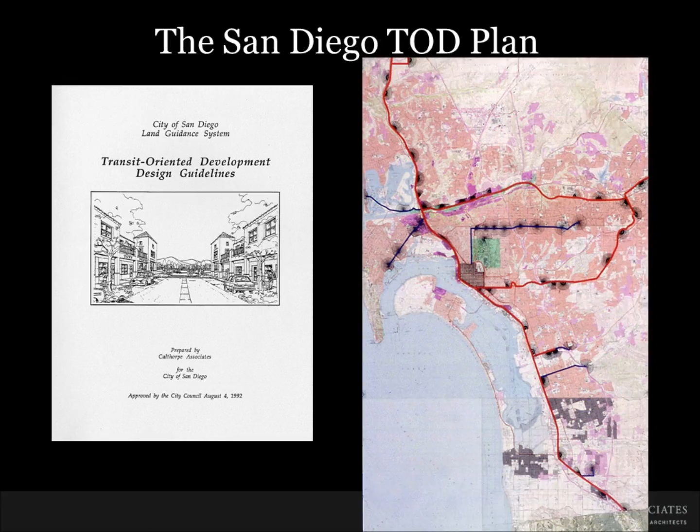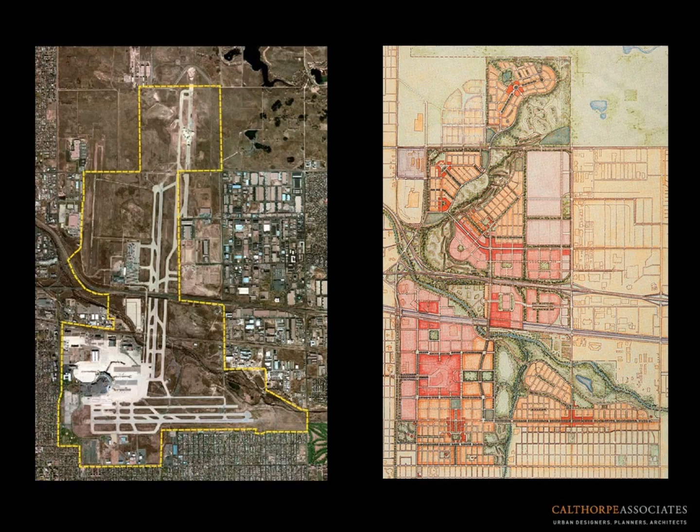Stapleton now is pretty mature—some of the downtown is 15 years old. It has a mix of uses, with some of the earlier buildings being all ground-floor retail on the bottom. This was considered high density at the time, but we wish it was more 'up density' at this point in downtown Stapleton; they wish they could have had more in this area.

It mixed not only uses but also a broad section of housing types and housing economies—they were selling big single-family houses right next to affordable housing in Stapleton, as it worked out. It transitioned from single-family to a townhouse product, all the way up to the multifamily you see in the town center.

And then they had their Trump route—no, sorry.

There were large open spaces in Stapleton that really impacted the place. Even in the existing grid pattern, there wasn't much real community open space, and Stapleton was able to provide that—the mix of uses, the broad cross-section of product types and economics, plus open space, including unprogrammed open spaces and programmed ones like the amphitheaters.

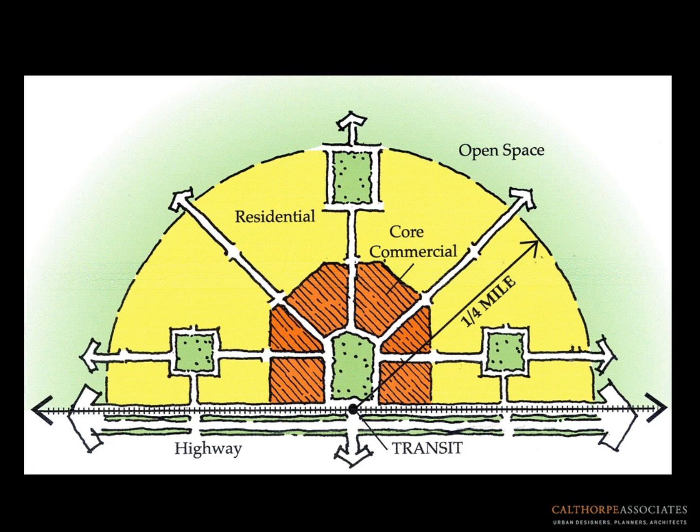Sustainability, conservation, and restoration - the reuse of land, the regeneration. Is it a change of use, or the same use with more intensity? Creeks were buried - let's dig up creeks and have them as features again.

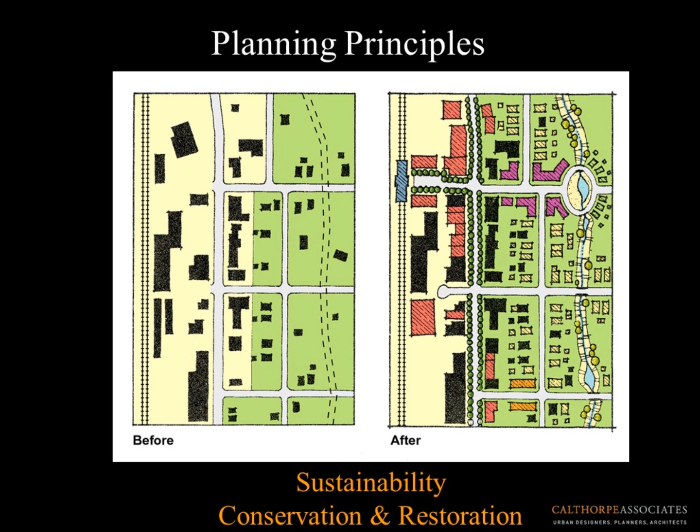So to show you this principle, I have a plan that doesn't work - an image that sort of somehow got strange on me. The Bay Area was at the time looking at regeneration of growth and where to infill. There were six different ones in the Bay Area that we worked on, and Alok probably worked on most of these together with me.

Old Elm Village was in Petaluma, an infill site along the Smart Line - this is the Smart Line right here. It was this very odd piece of land behind a highway and some industrial area.

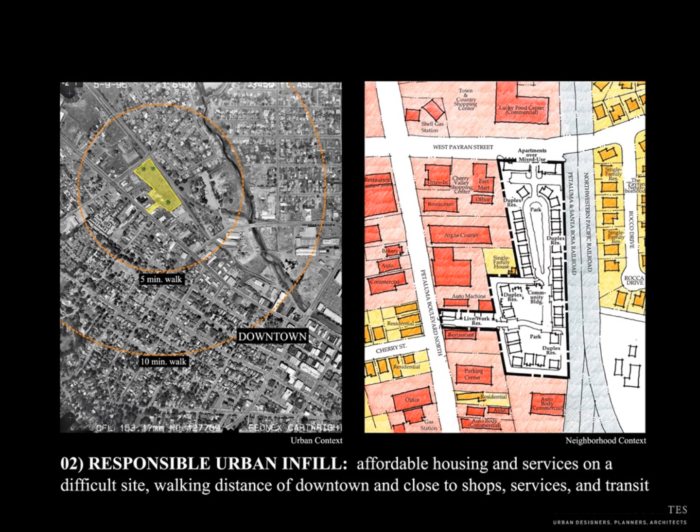And we managed to put in a number of houses, all affordable housing. We were hired by Burbank Housing, which is 100% affordable housing entity out of Petaluma. We did it around the park again, and mixed the product types within it. We got some pretty good density, even with some low density housing product types - they're all duplexes actually, each one of these, with 100% affordability.

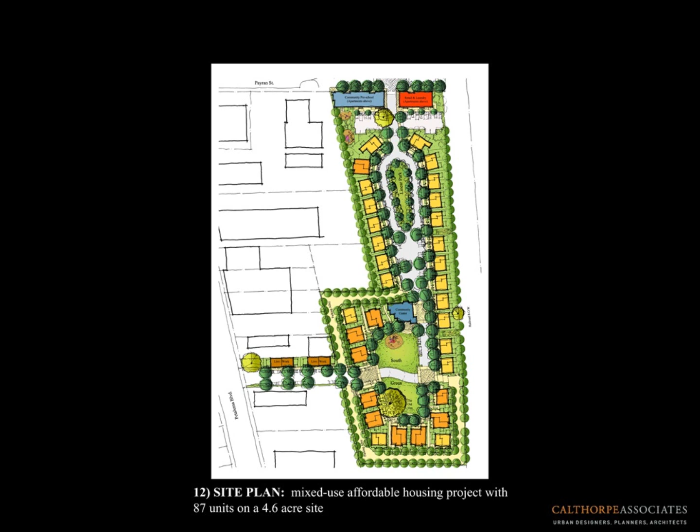Alok was the project manager - before my time, but I remember visiting it had the multiple curves. We actually had a fire engine come around to make sure it worked. The biggest issue actually was the street here, and they got very mad at me in the end. We had parking on both sides, parallel parking on both sides, but in the end they didn't implement parking on both sides because the truck couldn't get through - or actually because the big cars couldn't park. So we had to redesign this entire backside for the capacity we had on the ring road around the park.

The next one in the Bay Area is this transformation of BART stations - this is the Richmond Transit Village.

All surface parking at the time when we got a hold of it. Two magical things, I think, were happening at Richmond at this place at the time. The first was they were able to afford a parking structure to consolidate this parking, which freed up all the land for development around the site.

The second thing is they built a station that consolidated one of the only true 3 transit systems connections: Amtrak, BART, and the Golden Gate Transit. All were consolidated at this spot. There was a bus piece, the Amtrak was this side, that track, and this is the BART station. They consolidated all 3 of those systems at this point, and it's the only one in the Bay Area, I believe, that does that.

We came in and actually filled up the underground. It was an underground passageway, the old 70s design, going underneath the tracks and then back through. It actually got infilled and became an at-grade surface here. These are the 3 systems now: this is BART, this is the Amtrak, and this is sort of the bus consolidated piece.

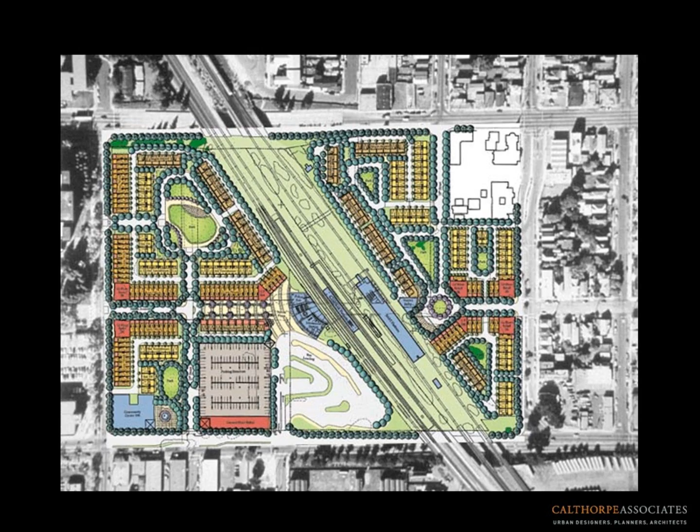All the parking that was on the surface was built into structured parking, so that freed up all the land. And it's mature now, a mature place. This was where the BART Plaza was, that you used to walk underneath with these sloping lands, and now it's lined with townhouses and other uses.

When Clinton was president and Cisneros was head of HUD, he developed a program called Hope 6. So we worked for about 5 years doing Hope 6 projects over that time frame. Hope 6, I don't know who's familiar with that, was a program that was trying to mix uses and intensify the decaying urban housing.

Before Hope 6, Housing and Urban Development was solely interested in low-income housing, and its main focus was housing projects. There's a long history of housing projects that have been to the detriment of the community rather than an asset. So Hope 6 basically took a fresh look and said we can deliver more affordable housing, but we should also include market rate housing and a mix of uses, so the federal money spent leverages more walkable, more livable neighborhoods, as opposed to just worrying about a building with housing in it.

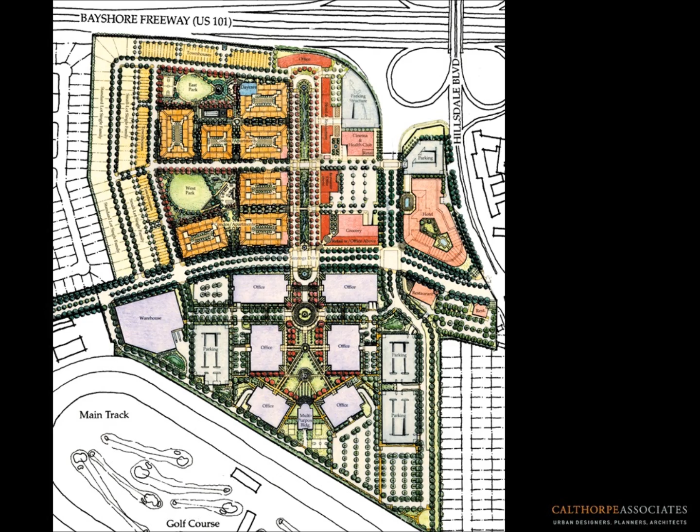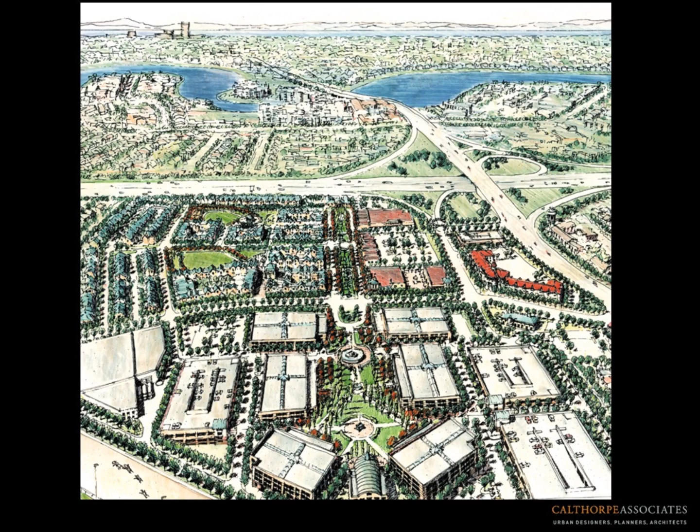These are done by Thomas Prosek. He's one of the early renderers at the time that was doing this to help us imagine what it would look like, with the sort of bay in the background and the extension of 92 and 101. And this is what it looks like today.

The Whole Foods is at this corner. This is this corridor, Franklin Funds here. These are hard to see, so I'm just going to sort of roll through these. And then the residential on that other side.

The Crossings. It was originally the old Mill Mall. This is the layout of that thing. It was sort of an anchorless mall, if you'd want to call it that. There was no real big store within it at the time. It was bought by a group called the Plymouth Group.

One of the most important things that happened is the Caltrain station moved from Rengstorff to this site. So when we filled it in with the housing, this is where the new station was placed for the Caltrain station stop.

The incredible disconnect between houses and jobs in Silicon Valley was a monster to tackle, and it probably still is a monster to tackle. The need for housing was incredible. At the same time, there was this idea that we still needed this smaller scale stuff.

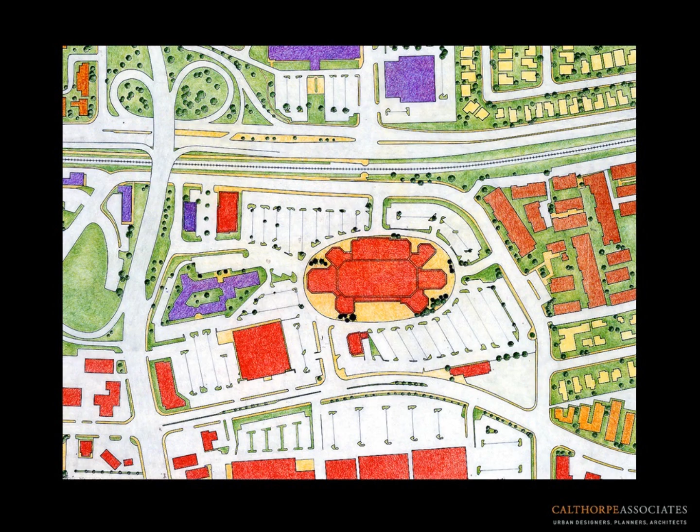Once again, I think if we went back then, we would have much higher density product type in this. But at the time, we were stretching the limit by doing 3 stories here, 2.5 stories of townhouse here, and very small lot, single family on this edge. In fact, we had to build up to that.

The market was really only in place for the single-family homes. That was all that the developer really felt comfortable with initially. So there was a phase 1, which is the yellow single-family homes and some of the townhouses. And then as the economy improved, then we were able to move into the higher density.

Nobody would touch, the banks wouldn't touch this project. They said it's not going to work, there's no way you're going to infill in this site. The gentleman who bought the land...

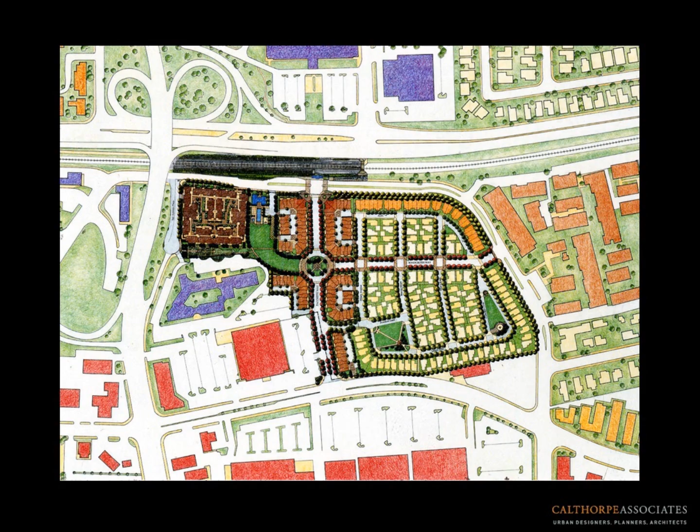financed 4 houses, 1, 2, 3, and 4. He self-built them, paid for them by himself. He built this park right here and these 4 houses. One of the original photos is just of these 4 houses, not even these. He self-built them by himself with the park. He basically drove away after this was all said and done in a Maserati with a cigar, waving us all goodbye and flipping off the banks.

It was a huge success. Every time somebody came to see a single-family house, he told me they sold a townhouse. Every time somebody came to see the zipper lot, they sold one of these. Every time somebody came to see an apartment, they sold one of these. So it was this strange mix of, I'm looking for something, I got something else.

Well, and in spite of the reluctance to do this, this had the highest absorption rate of any residential project on the peninsula when it was built. So there was a reluctance from the market to build it, but then there was enormous market acceptance once it was built. Yeah, the banks would have loved to get a hold of this now.

They just thought it wouldn't work. Small lot, single family, are you crazy? These were 30 feet wide and 60 feet deep, this product type.

It's about almost 15 to 20 dwelling units per acre for this. These are about 30 units per acre. This is called the zipper townhouse, where it's a sort of staggered property line.

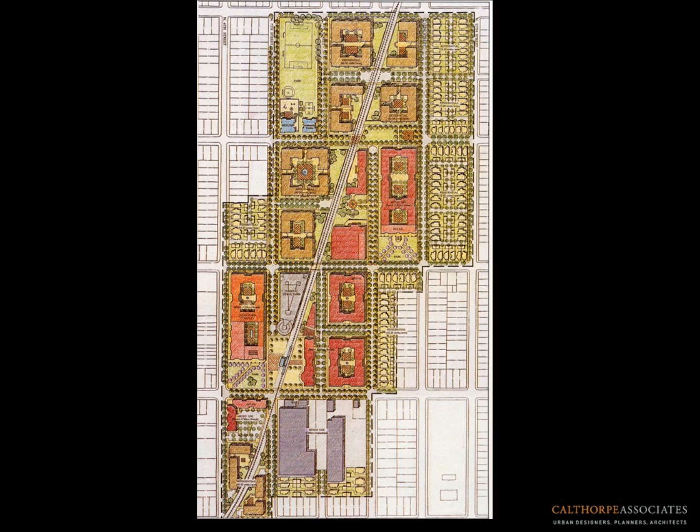Between Jackson Taylor was an early transition of an industrial use to residential. This idea that it's a combination of existing buildings and new open sites. So the reuse—some of them are actually an old existing industrial water tank combined with the new housing, some of the new housing with the existing neighborhood.

So a real sort of comprehensive overall plan and a mix of reuse and new development interspersed to create a new place. If anybody's been to the Gordon Biersch brewery, I think this is Rick's project—that was one of the first things that happened within this area, and it's pretty well built out now.

It had a similar idea too, that you had to buffer where it transitioned to the neighborhood. The idea that the higher density housing needed a secondary edge to make sure that it dealt with how it sat in the residential neighborhood. I think that was one of the big concepts.

And the guidance that accompanied that had radical notions, like the front door of the unit should actually face the street, right? And that the parking should actually be behind the buildings, mid-block, or below the buildings if you can afford it, with the higher density product.

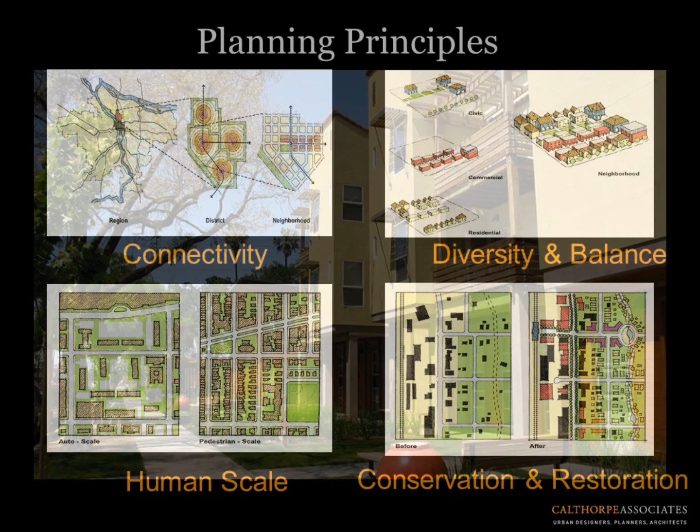So that was it. I brought a couple of these old plans—I was moving around that, which is one of the sort of funny originals. We can all look back and laugh at the original paste-ups of our guidelines. The other thing I brought that I thought might be of interest was one of the original plans of Portland, where we actually cut and pasted—it's made on sticky-back, USGS maps, laminated.

Well, the hands-on, sort of artisanal approach—I think us old-timers appreciate it. But I think one of the main takeaways from this is just how long we've been at it, and the kinds of strides that have been made.

And I think, Joe, I wonder whether you could summarize some of the things that you think have been the biggest strides as far as the accomplishments of the Congress for the New Urbanism and Calthorpe Associates in particular. But then also I wonder whether you could comment on challenges that remain, or things where we haven't gotten there yet.